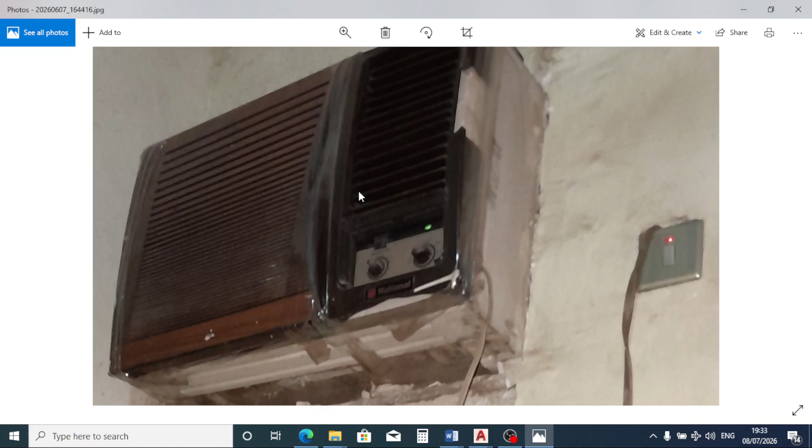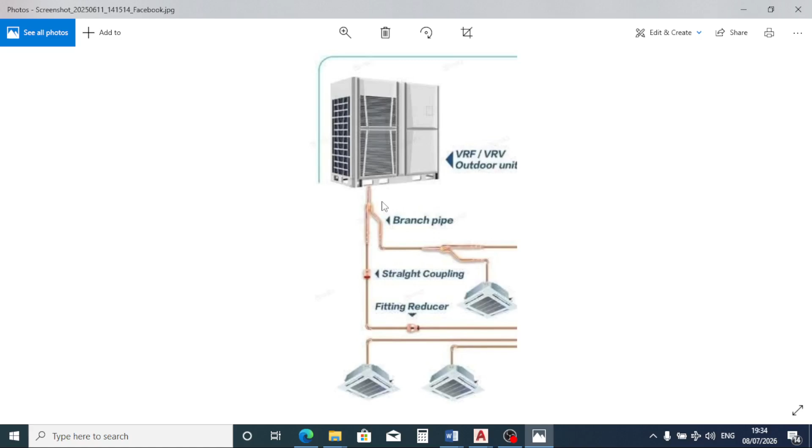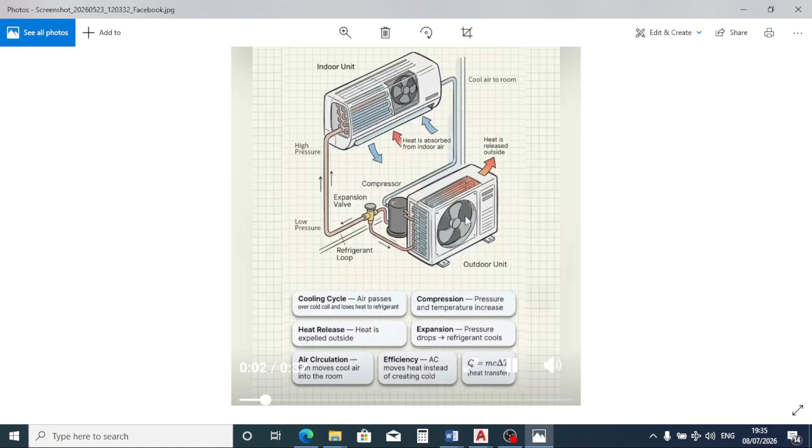Having said that, now let's begin placing our ceiling cassette. For the purpose of this training, we are going to be using the multi-split system and single split system for the various spaces we have. So for this staff room, I'm going to use a ceiling cassette. Why? Because a ceiling cassette is located in the ceiling, and it is preferably used in long spaces for efficient and equal air distribution.

If you use a wall hung, it will just focus on one area, even though eventually the air will be distributed in the space, but a ceiling cassette will be more efficient. But it's your choice. If you prefer to use a wall hung, you can of course do that.

So now for this space, you can see it's very long, so I think 3 ceiling cassettes will fit into this space. As usual, we are going to place the components, then subsequently carry out the calculations in order to size them properly. So now for this, let's use our array tool to place this ceiling cassette, but let's measure the breadth of this staff room.

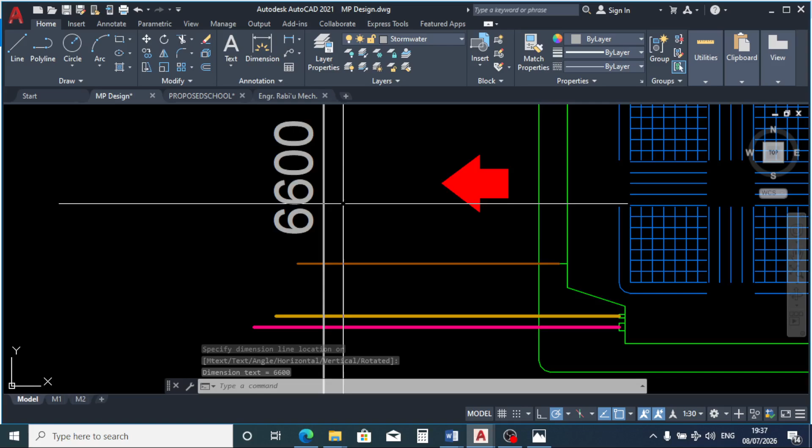6,600. Okay, so since we are suggesting 3 rows of this ceiling cassette, we are going to divide 6,600 by 3.

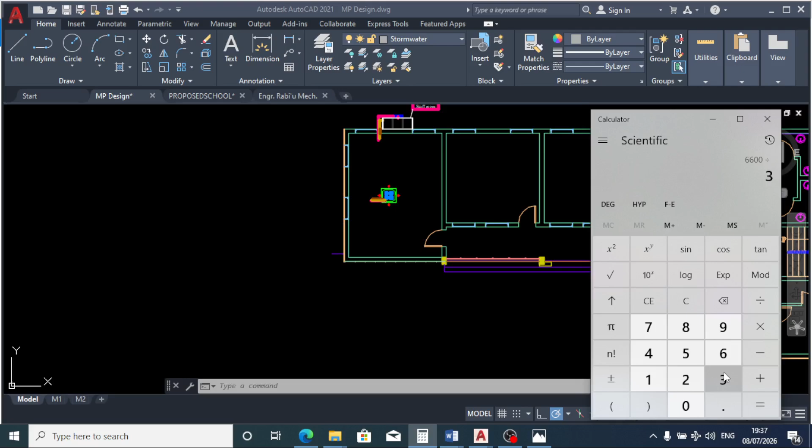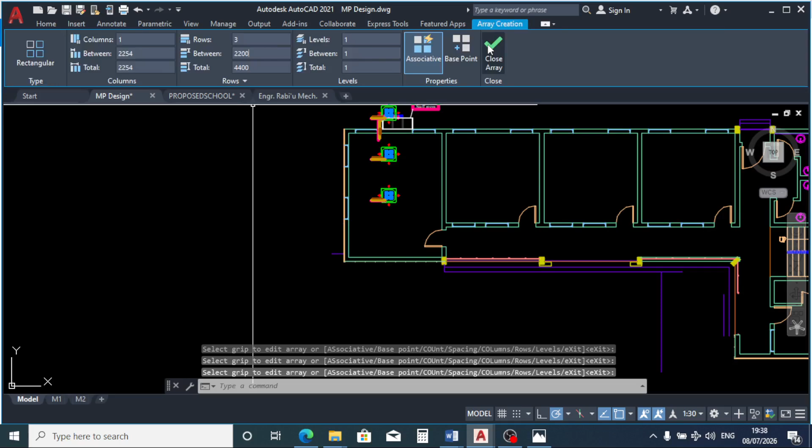2,200, so that will be the distance between the ceiling cassettes. So we are going to use a rectangular array, not a polar array. So for the column, it's going to be just 1 column, while for the rows, 3 rows, and the distance between them is 2,200. Okay, so here they are.

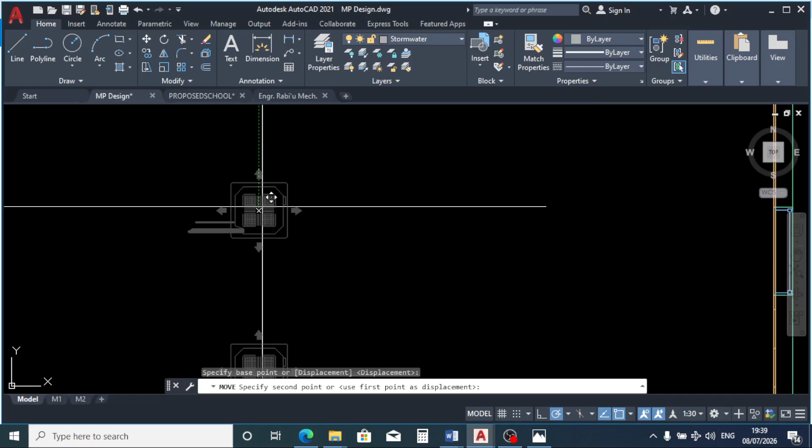So let's get the center of this staff room in order to place our ceiling cassettes, to centralize our ceiling cassette. Alright, so now, these are the ceiling cassettes, while this is the outdoor unit known as the

condenser. So now these pink, yellow and brown pipes: this pink is a supply pipe. It brings in the refrigerant to the indoor unit so as to evacuate the hot air, while this is a return pipe. It carries back the remaining refrigerant to the condenser, known as return pipe, while this brown pipe is the pipe that collects

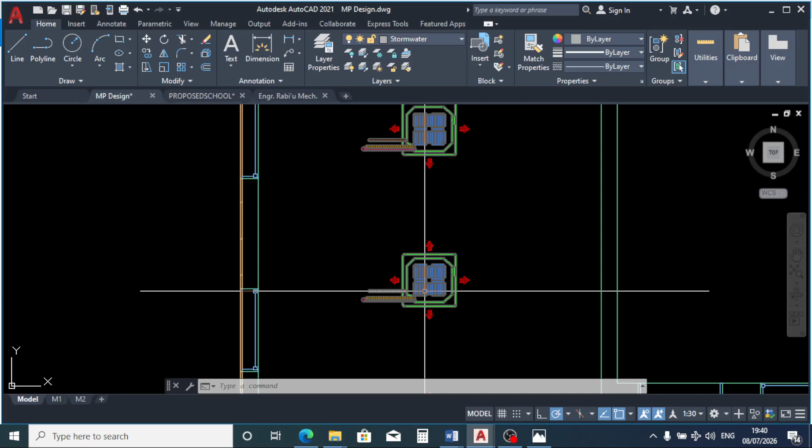the waste water. Remember, we said air conditioning systems also evacuate moisture. Moisture are tiny droplets of water. So this water will be collected in these indoor units in a gaseous state. When they come in contact with the cold refrigerant, they will of course turn back to liquid. So this liquid will be evacuated out of this indoor unit through this brown pipe as wastewater, and this is the drain line that will take the water out of the building.

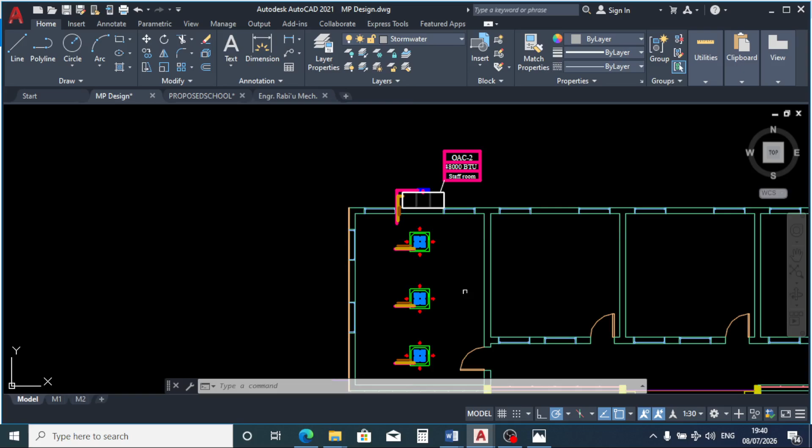That is why when we on our air conditioning systems, we see water dripping from the system. It is as a result of evacuating the moisture in this space that you see the water going out. It's not the refrigerant that is melting, it's the water being collected from this space. It will accumulate and be taken out of the building.

So this water is not expected to go into the condenser, and that is why you can see this pipe is terminating here. It's taking it out of the building entirely, while this yellow pipe is returning the remaining refrigerant back to the condenser, and then the process starts all over again. I believe we all know the air conditioning and refrigeration cycle. So now let's connect our pipes.

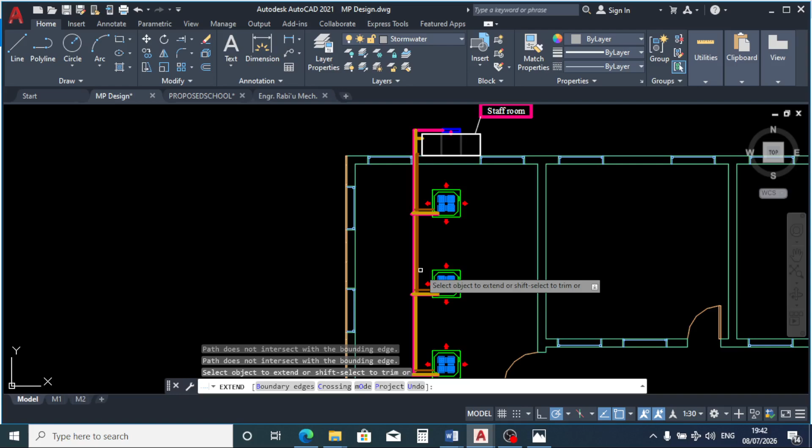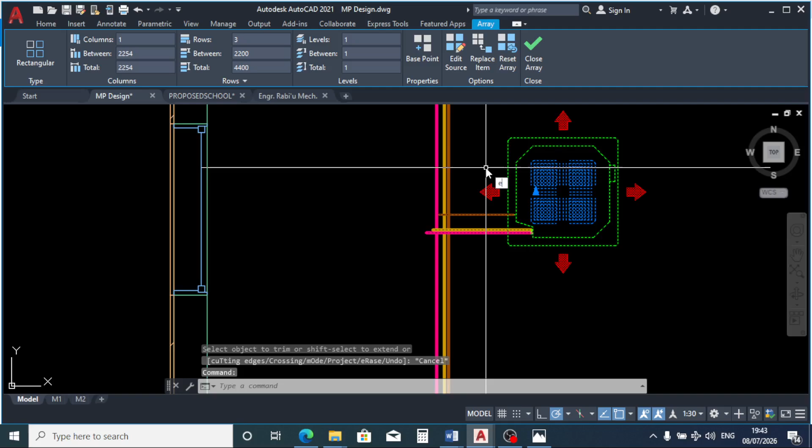I'm using my extend tool. I believe you know what I'm doing. Alright, so let's use our trim tool. Okay, sorry, it's not trimming. Why? Because this is an array, we have to explode it. Alright, so let's use our trim tool again.

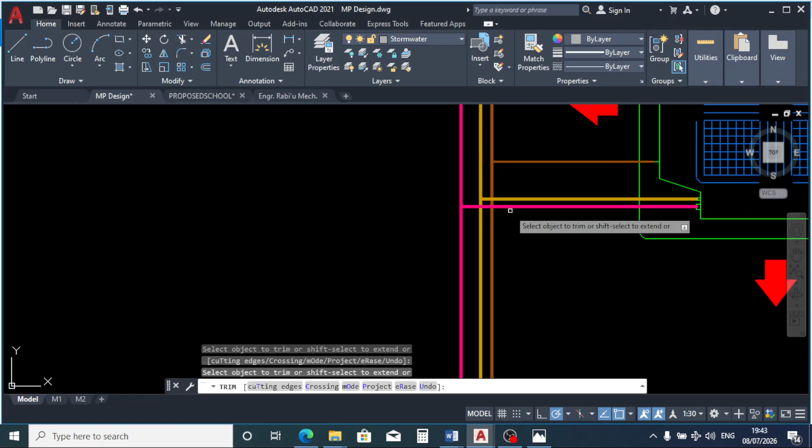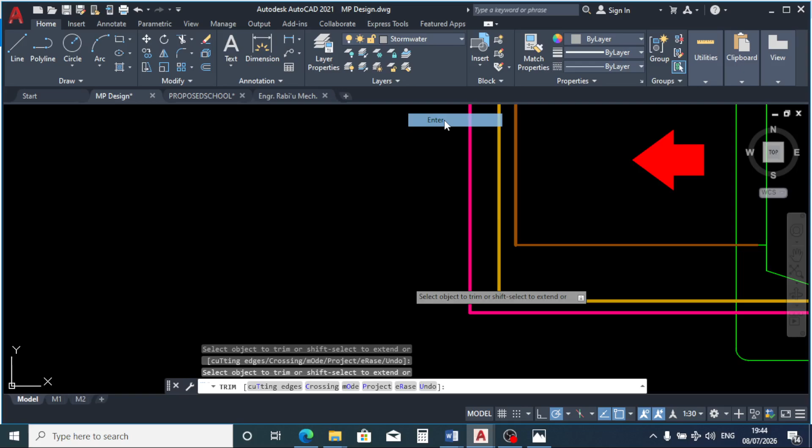Yes, so you can see this condensate pipe is connecting to this condensate pipe. That is what we want to achieve. The return pipe connecting to this return pipe, and the supply pipe connecting to this supply pipe. As for that cassette, now for this cassette we'll do the same. And here too. Alright, so that's that for this space. Now let's move to the next space.

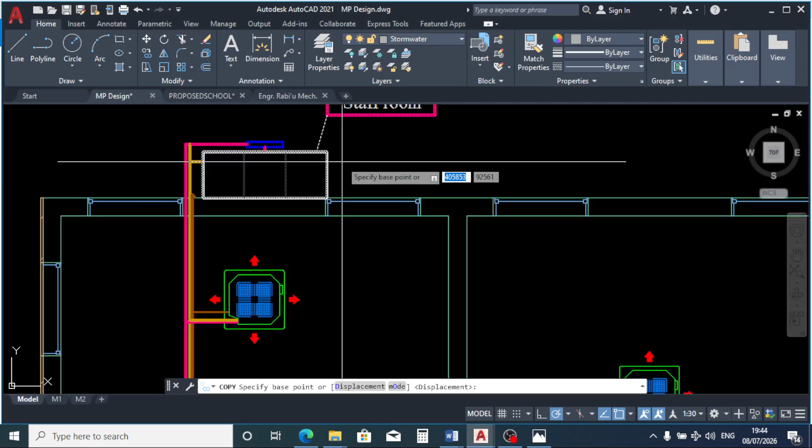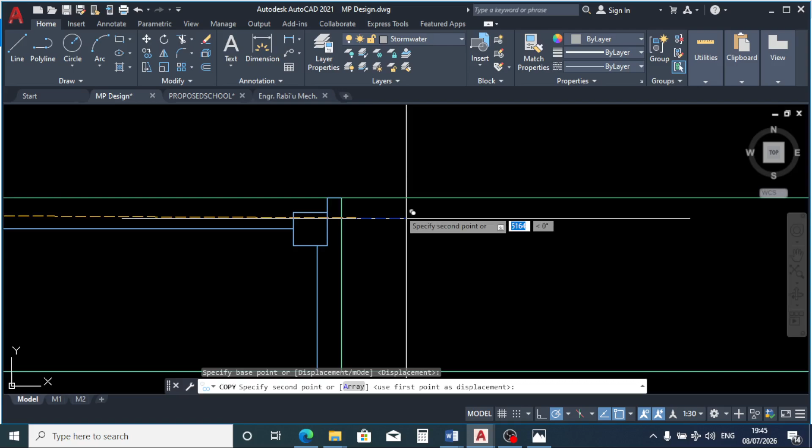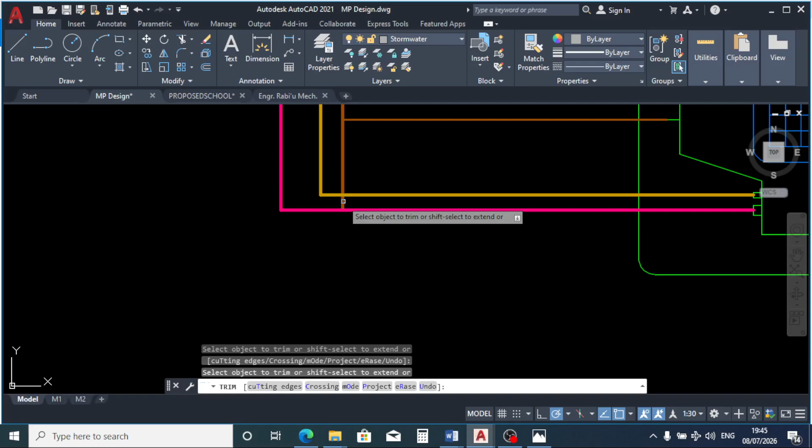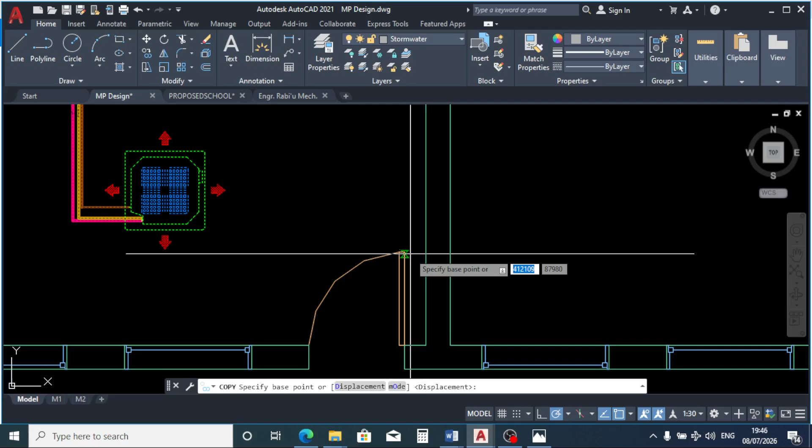What just happened? Okay, let's copy everything. I want the pipes to come along. Okay, I wanted to use array for this space as well, but let's leave it as it is for now. After our calculation, we can still adjust the arrangement if we feel it's not okay, but for now I think it's pleasing to the eyes. And we can just copy this with this reference point, paste it.

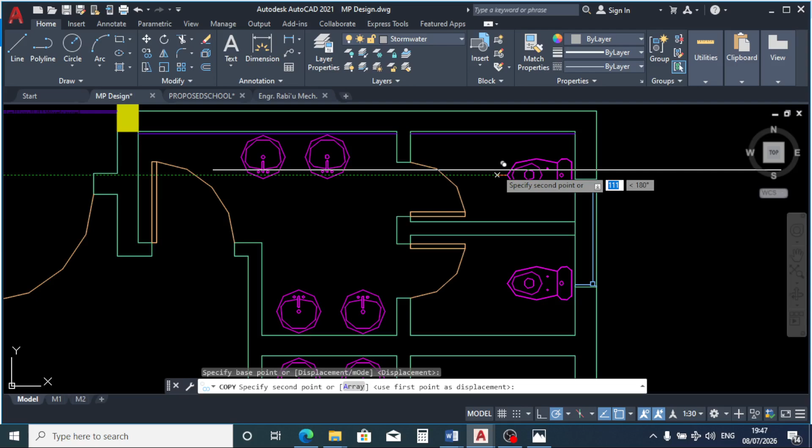Alright, so, oh, there's a difference between the size of this conference room and our staff room. You can see it's coming down a bit, so we can just take them up.

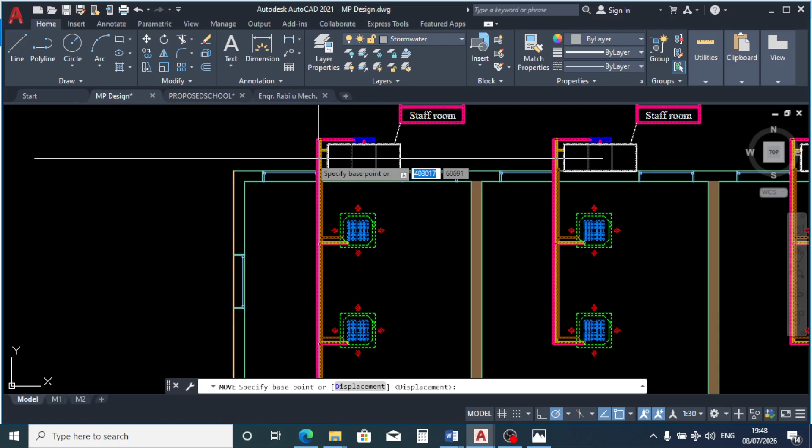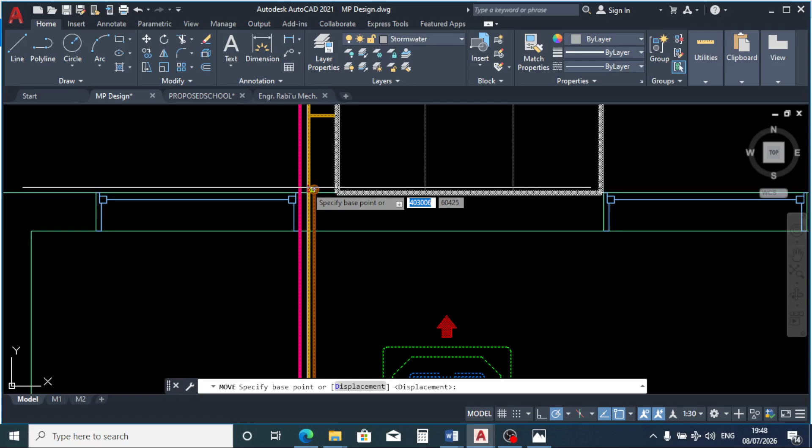So you can see even from the look of this, it's not centralized, so we will still need to make some minor adjustments, but for now let's leave it as it is. After the calculation we can do that. I don't want this to be crossing the window. Okay, let me take it a bit further. Alright, so that's that for our multi-split ceiling cassette.

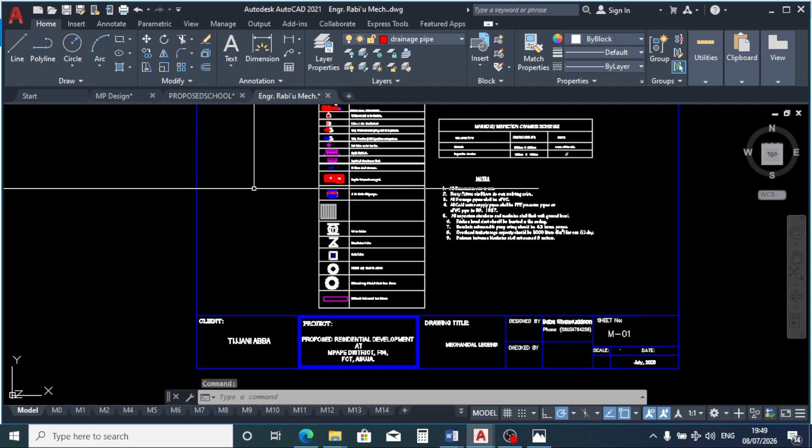Now for this office we can use a wall hung, since it's a small office. So let's get a wall hung from one of my previous designs. Copy to clipboard.

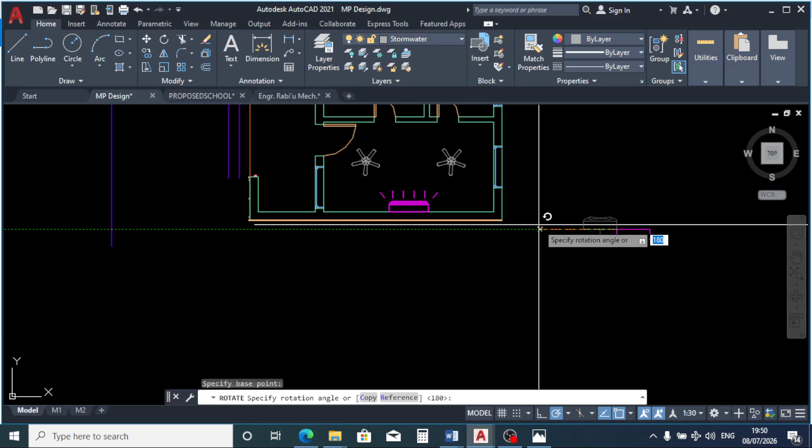So this is a single split wall hung unit. It is single split. Why? Because it's just one indoor unit connected to one outdoor unit. This represents the condenser, which is the outdoor unit.

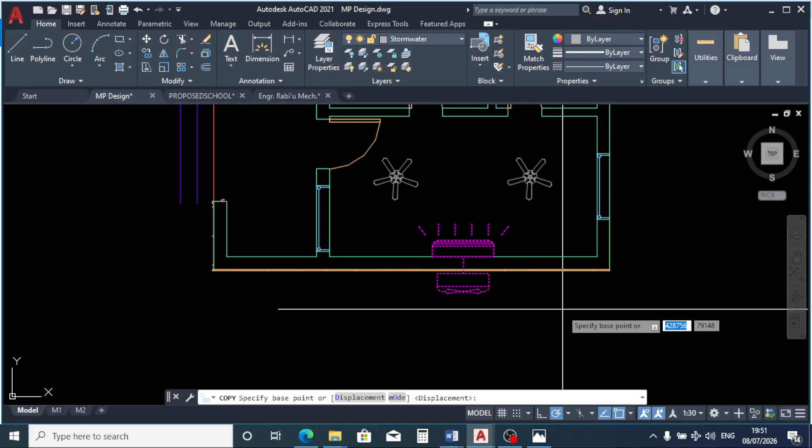Alright, so let's see if we can copy this as it is to this office. Alright, yes, I think it's okay.

So now the next thing we're going to do is to bring in our extractor fan for our toilets. An extractor fan is a component of a ventilation system, and I told you what a ventilation system means. This is a toilet, so definitely there is going to be odor and maybe moisture. So this extractor fan will evacuate the air and allow fresh air to come into the toilets. So let's get our extractor fan.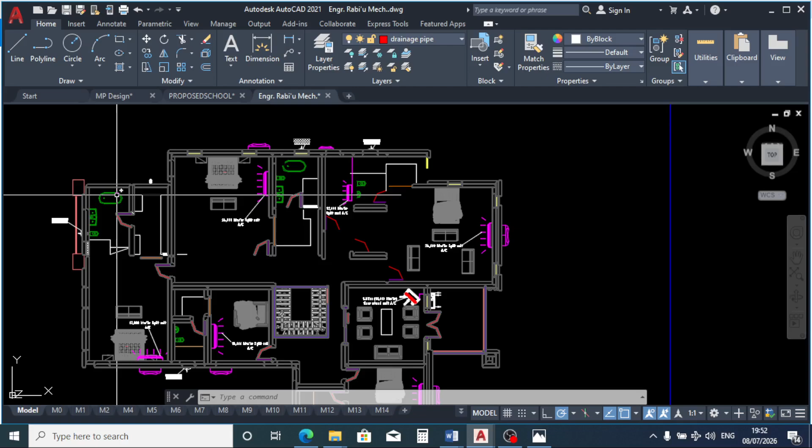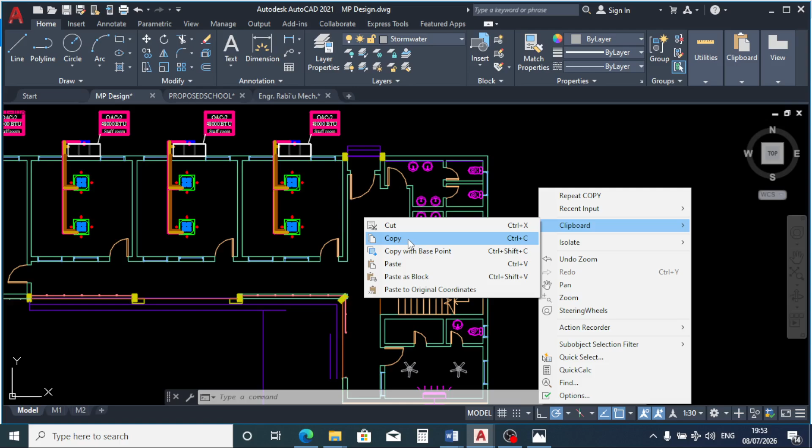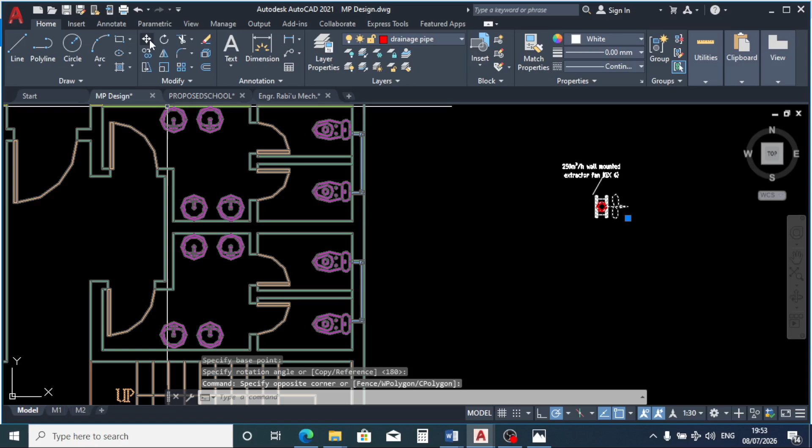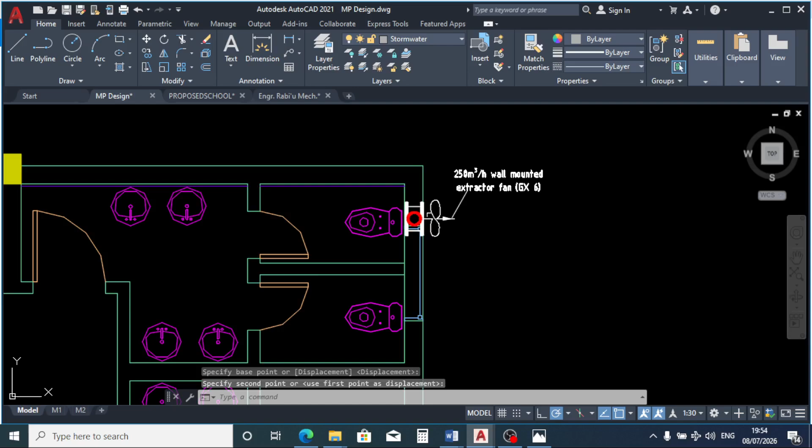Yes. Do we need this level? Okay, let's just bring it. When we do the calculation, we can resize. For now, let it be there so that we don't have to start typing all over. All we need to do is just to edit. So let's copy this extractor fan to the remaining toilets.

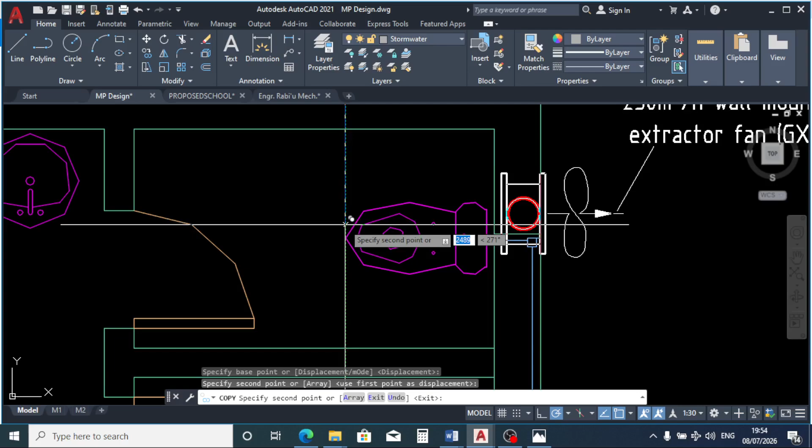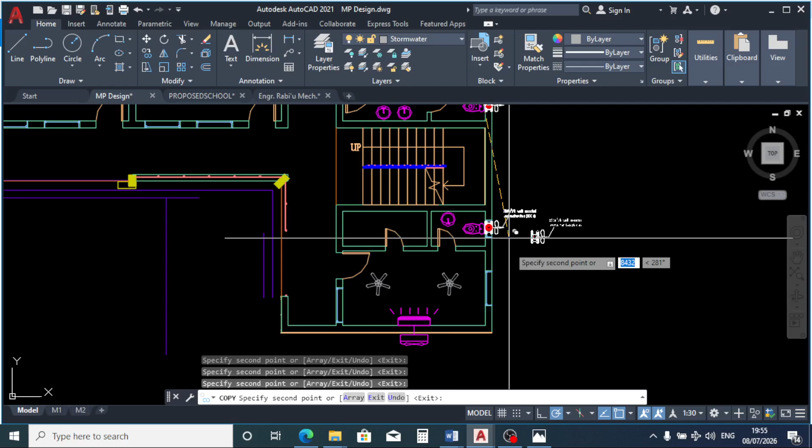So the extractor fan removes air to allow fresh air to come into the space through windows or a ventilation fan. A ventilation fan brings in air, it doesn't remove, while an extractor fan removes air. Since we have windows in the toilets, we don't need a ventilation fan. Once the extractor fan removes the polluted air, the window will allow fresh air to come in, and even through these doors. So let's copy this to our first floor.

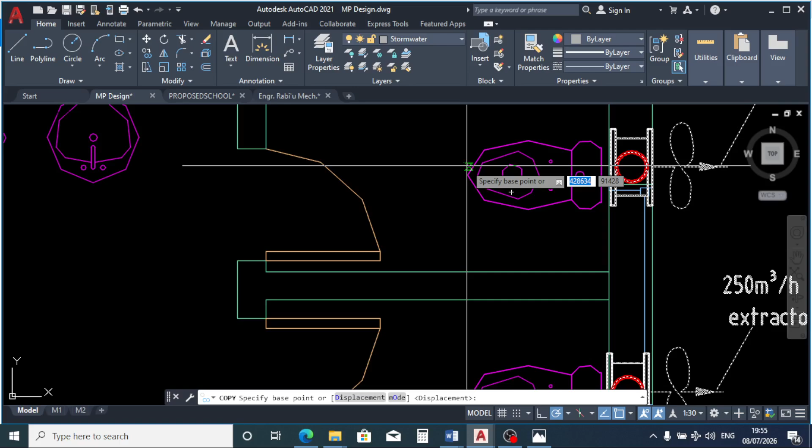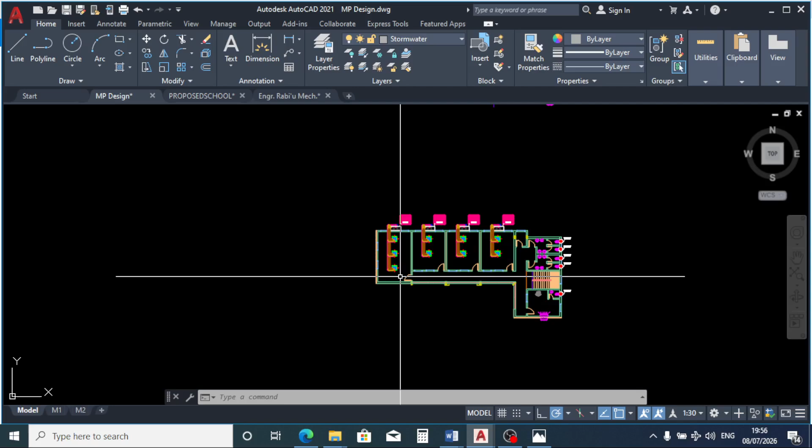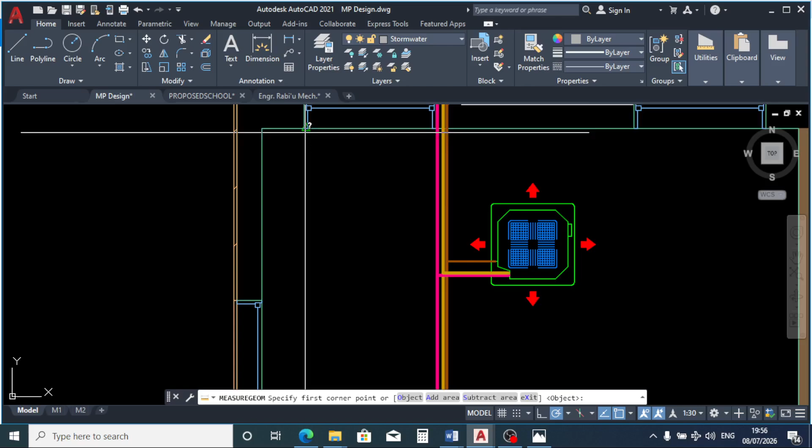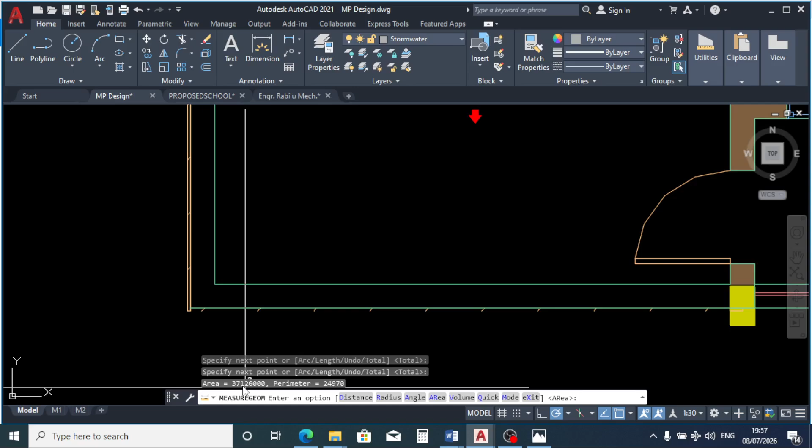Alright, I think everything is in place now. We have our extractor fans, we have our air conditioning systems in place. The next thing now is to carry out the calculations. So let's start with the conference room. Let's get the floor area of this conference room. Remember how to get your area. So the floor area is 37.13 meters squared.

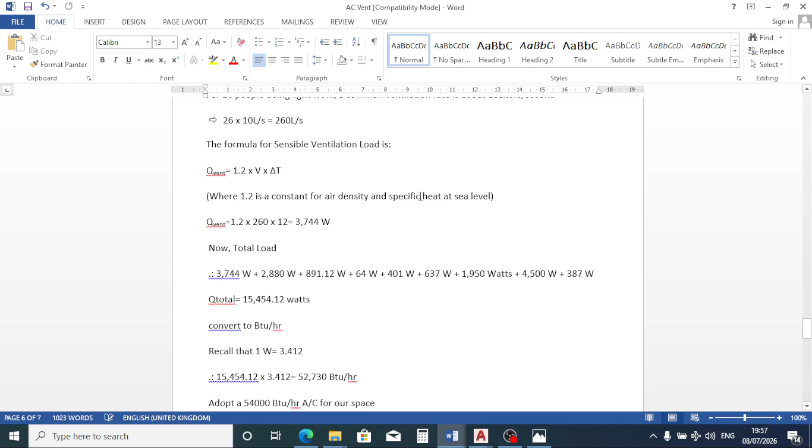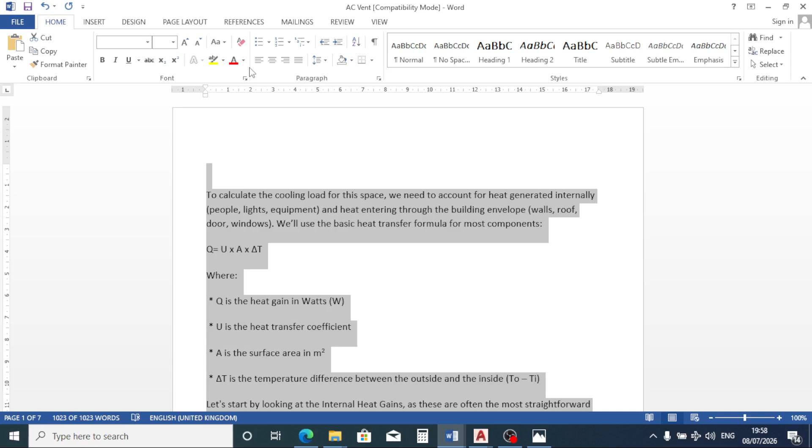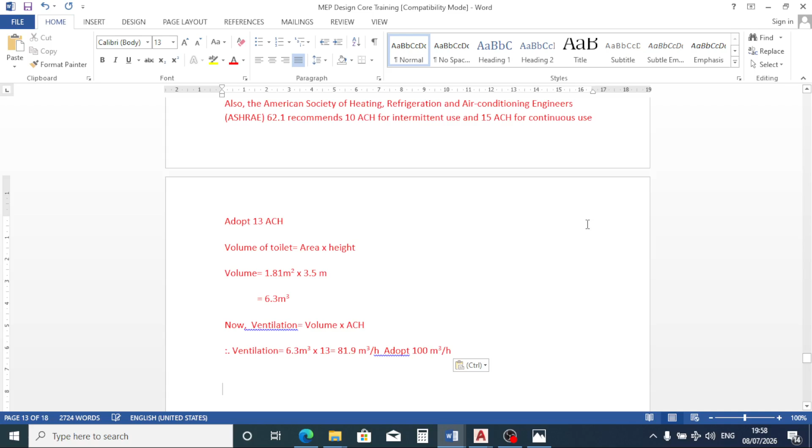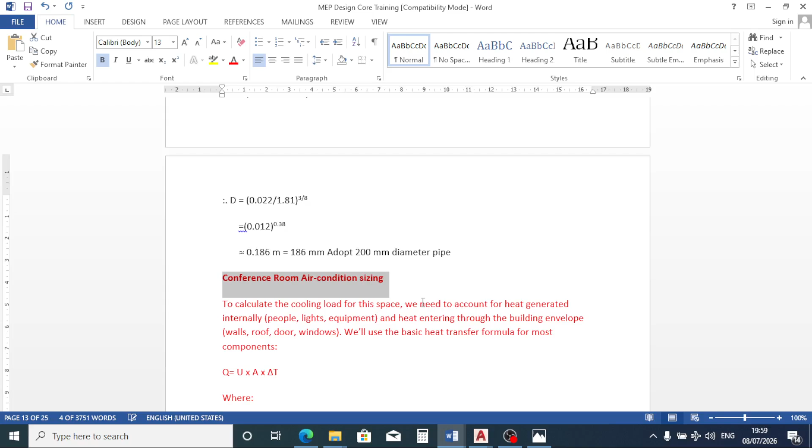So let's go to our calculation page. Let's copy this to our calculation page. We don't need to be typing afresh, we'll just be editing this previous work I did. So let's get our data. Floor area 37.13 meters squared. So now we've gotten our floor area.

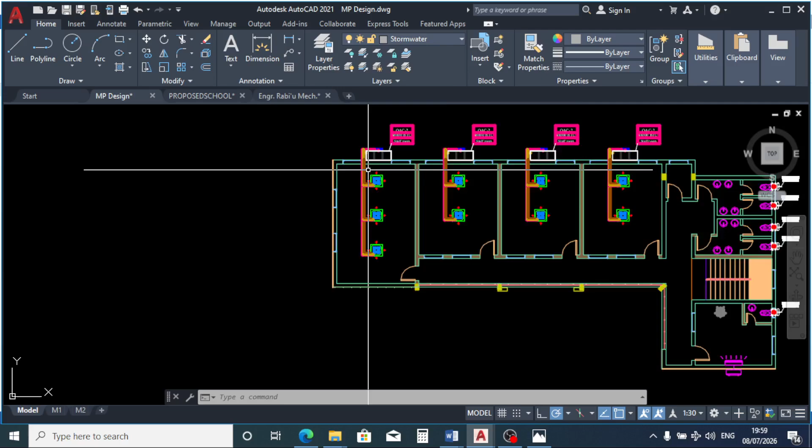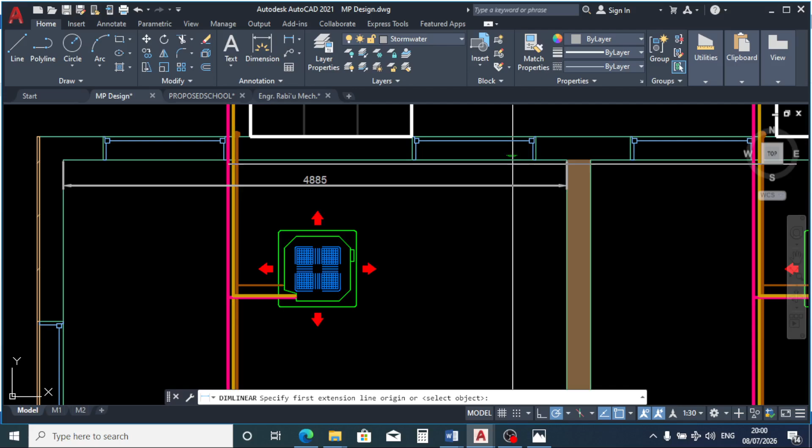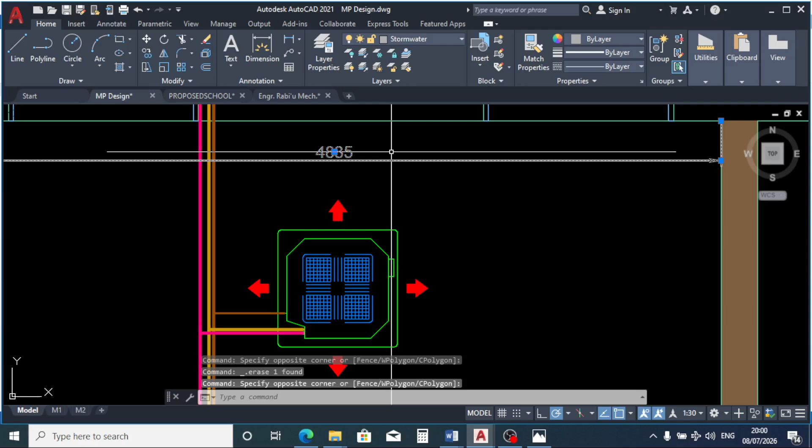Let's get the length and width of our conference room, so that we will be able to compute our wall area. So the length of our conference room is 4,885. Let's round it to 4.9 meters. Let's get the width. In this case, our width is longer, right? 7.6 meters. So 4.9 and 7.6. 3.6 meters. Alright, let's get our height also.

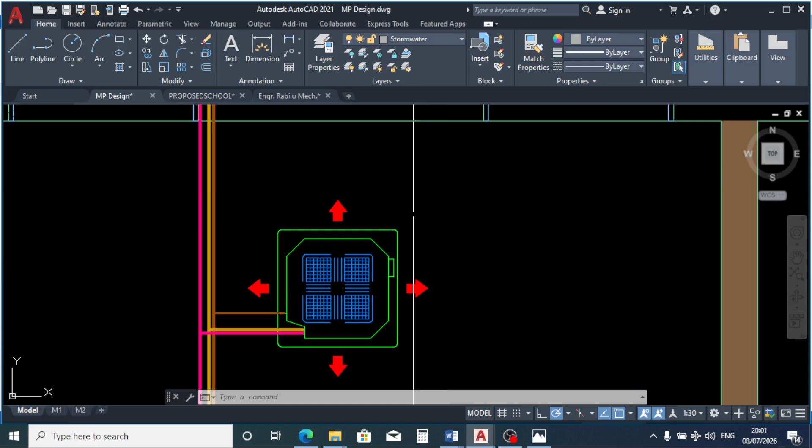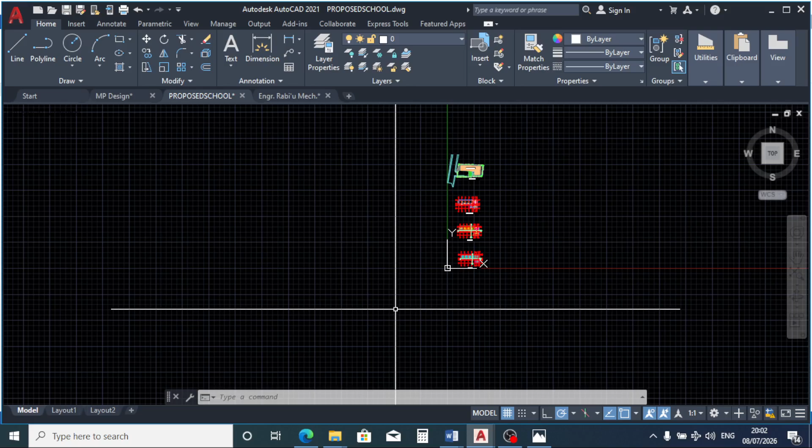Now to get our height, we will need to go back to our architectural drawing. Let's hope the architect has included the elevations. I don't think so. We have roof plan, first floor, ground floor plan, site plan, but nothing like elevation to give us an idea of the height, and we are going to need that. We are also going to need our window and door schedule, that is the type of materials and their heights. Let me show you what I'm talking about.

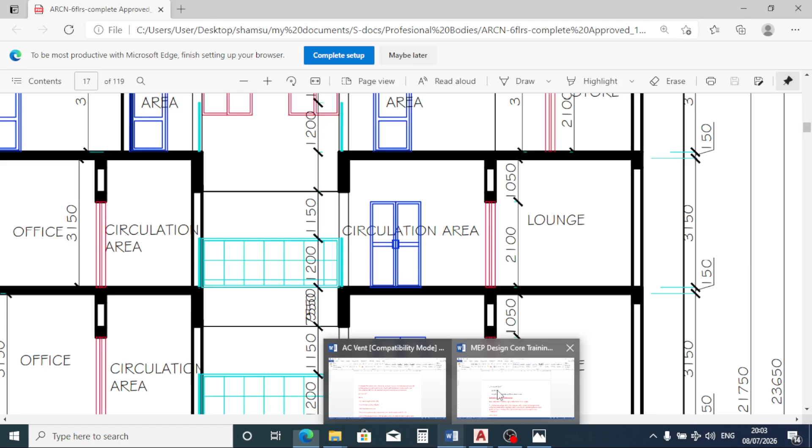So this is a typical architectural drawing. These are the elevations. Let me zoom in for you to see. For this door, the height is 2100. If you add the height of this door to this 1050, you get the total height of this floor. In our case, we don't have this, so we just have to assume. Let's assume a height of 3.5 meters.

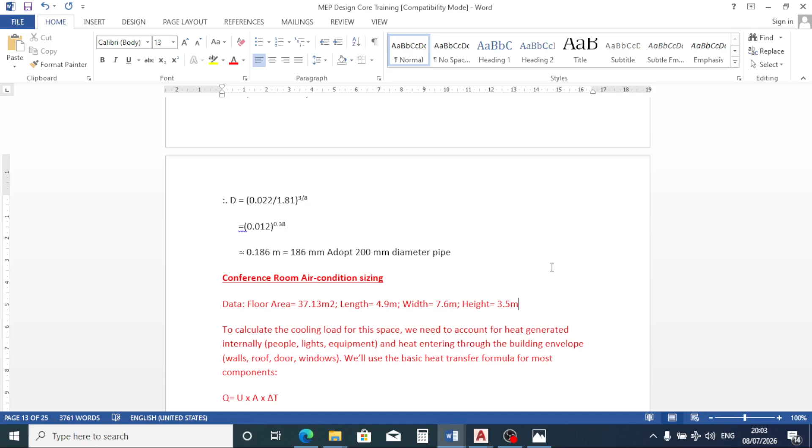Alright, in our next session we will continue with our air conditioning system sizing. See you in the next session.